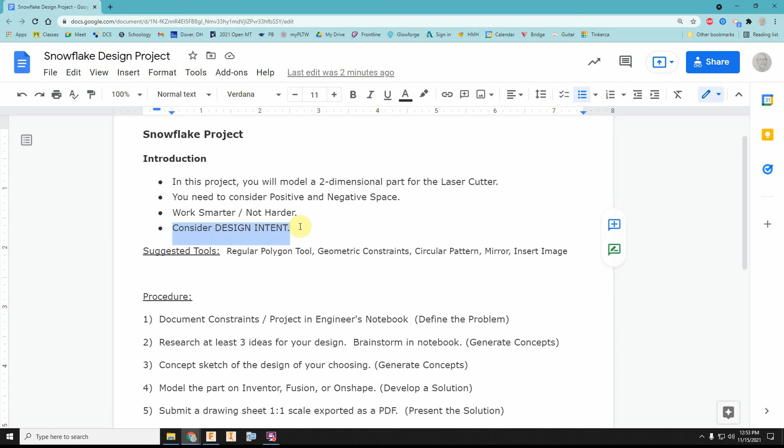In this case, that means we're going to want to make sure the origin is at the center. Makes it the simplest, and you're going to want to think about how you're modeling it with sizes and so on. You probably will want to use the geometric constraints, regular polygon tool if you're doing something geometric, and you can pattern that. If you are going to do a more complicated snowflake, you're going to want to do an insert image, which in Fusion is called a canvas.

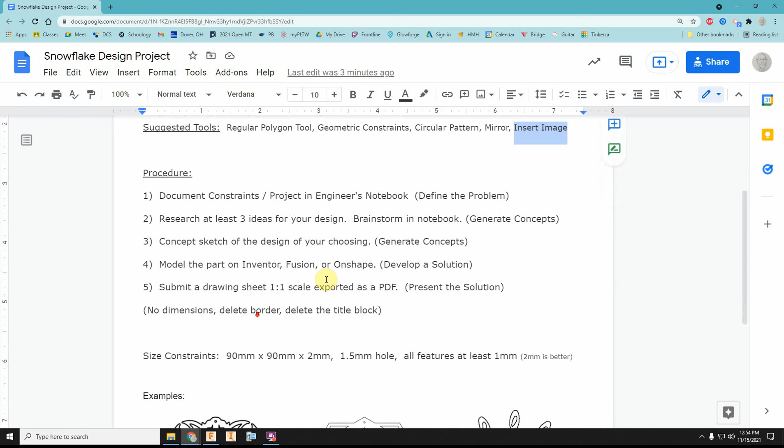For this project, demonstrate the full design process in your engineer's notebook. Document the constraints, research through ideas, brainstorm, make a brief concept sketch. You want to have an idea of what you're going to do before you start sketching on Fusion. Then you'll go ahead and model the part. There'll be another video that explains how you need to submit your drawing sheet for the laser cutter.

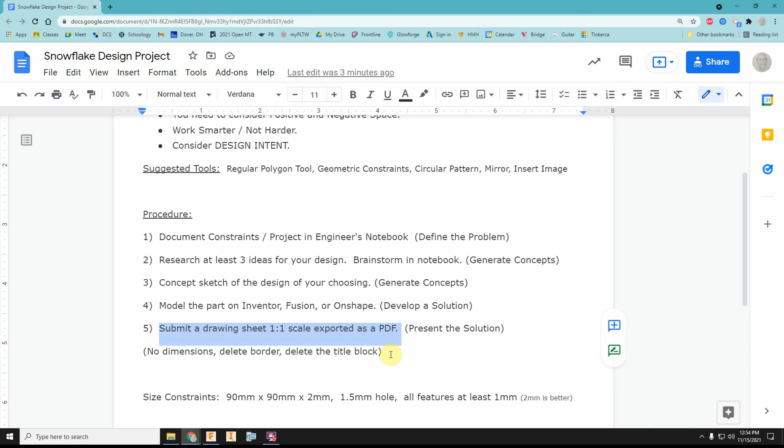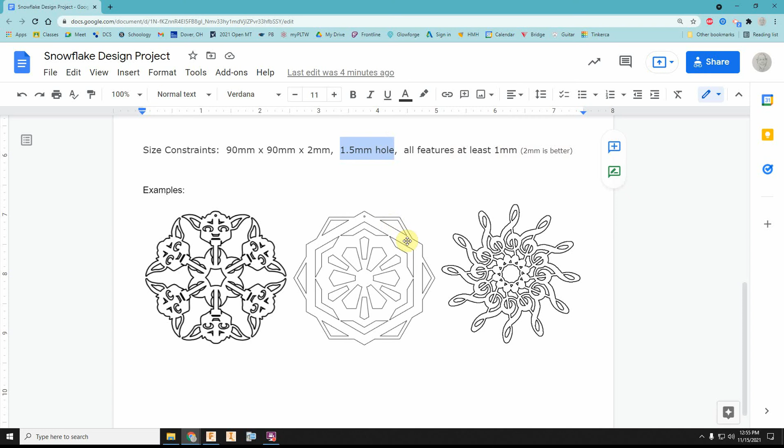The size constraints are 90 millimeters by 90 millimeters by 2 millimeters, and if you need a hole, you can drill a 1.5 millimeter hole. We're cutting these out of acrylic, and all features need to be at least 1 millimeter, though 2 millimeters is probably better. When you cut the plastic acrylic with the laser, it melts, so it makes it quite a bit smaller. So even though we're in metric, make sure you're making things a significant size, or your snowflake is going to fall apart when it gets cut out.

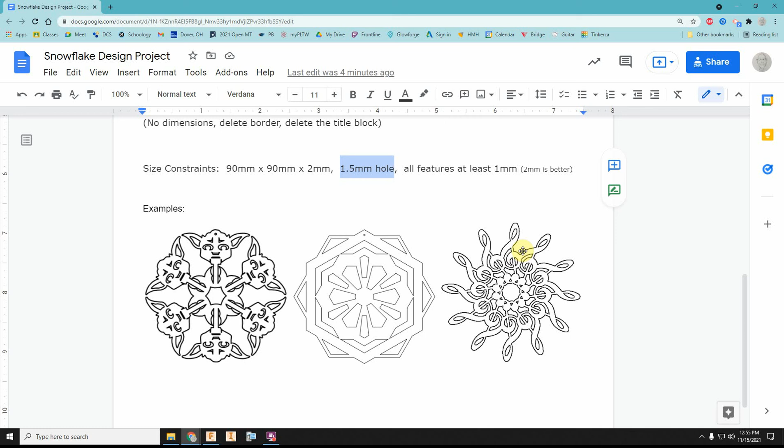Okay, so here we see some examples. We see the Yoda snowflake patterned 6 times, and of course the rebel sign incorporated into his neck. Here's a geometric design, and then there's another geometric design with the G-clef. So you can do something more complicated or something as a geometric design.

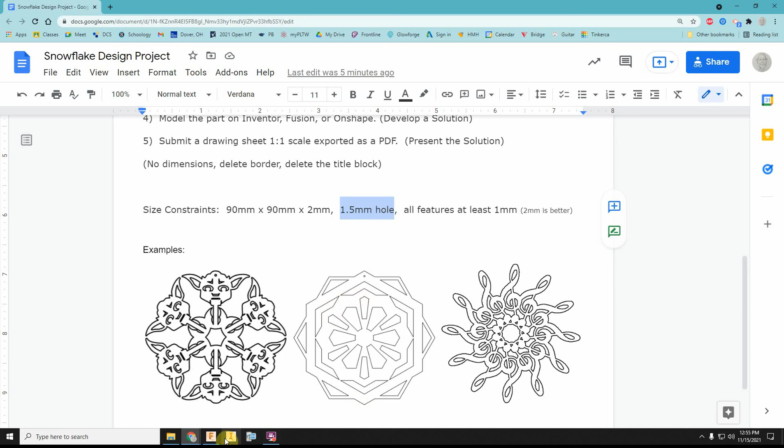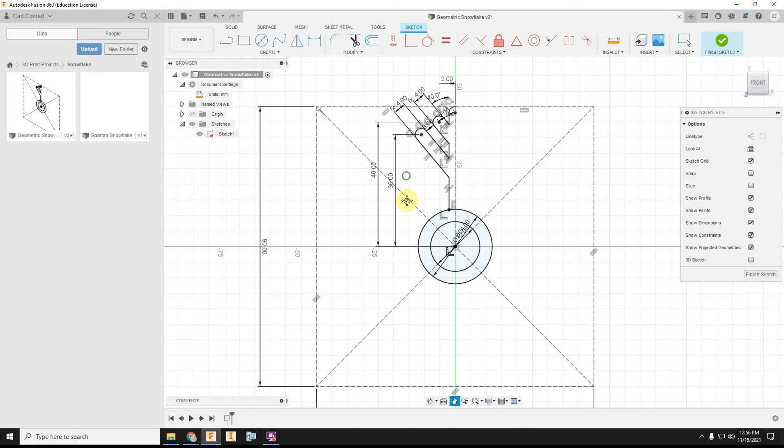Let's look at what a geometric design might look like. I've already got some things sketched out, and I'm going to go in and edit that sketch. One of the things that's really important is I've got construction lines drawn and sketched out so that I know I'm going to fit inside my 90 millimeter size constraint. The dimensions are really important on this, so make sure that we are 90 millimeters in size, or it's going to be too big, and scaling it's not going to work.

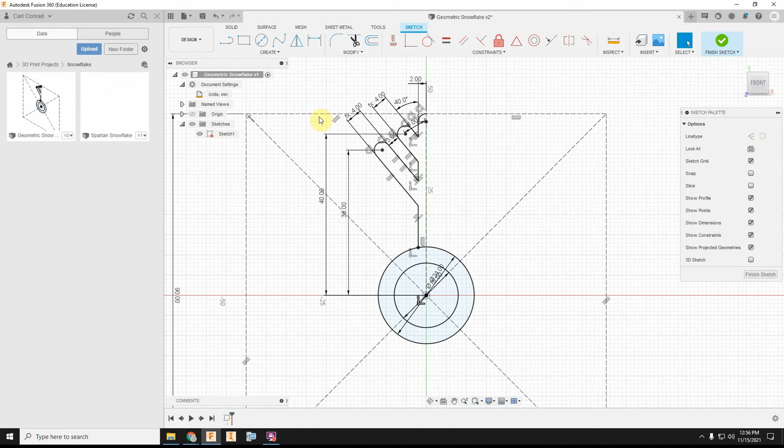I was saying everything should be at least 2 millimeters. 1 millimeter would be the very bare minimum, and I'm going for 2 millimeters, which actually is going to be 4 millimeters of thickness. So what might we want to do with this? I've got a lot drawn out, and the best thing to do is to pattern bodies and combine bodies into a single body. That's going to be the best way to do this with a circular pattern.

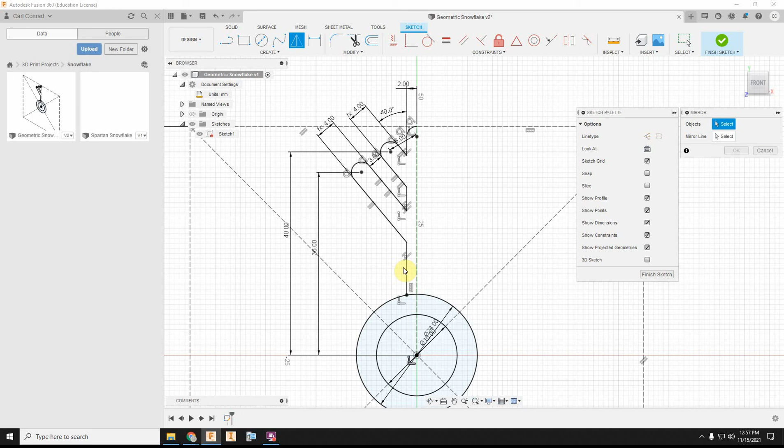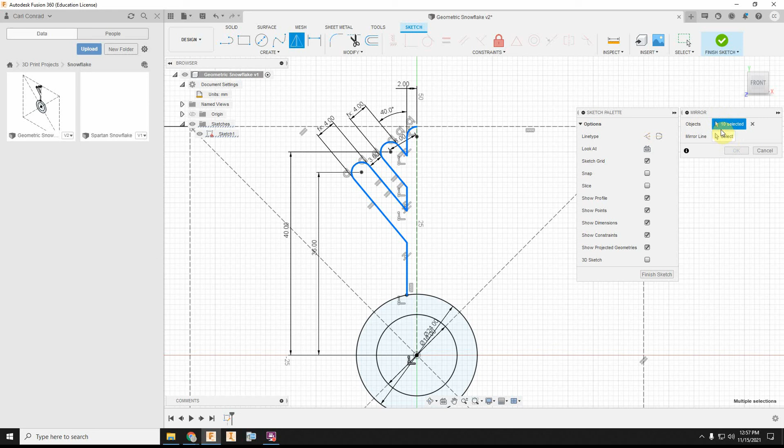So first thing I might do is go ahead and mirror this. You see I have this geometric design here already drawn out. I put in all kinds of geometric constraints to make it look like I wanted, and I put numbers in that I could change if I don't like what it looks like after I pattern it. So there's my mirror. I'm going to pick my mirror line and say OK. I'm going to finish the sketch and go ahead and extrude.

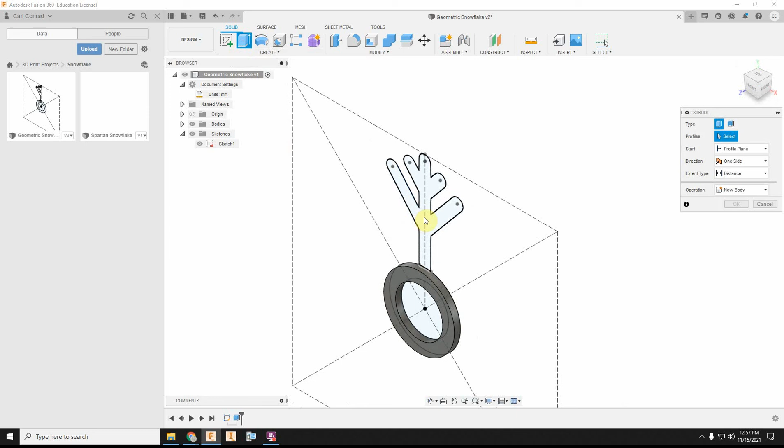When I extrude this, I'm going to select just the circle initially and extrude 2 millimeters. In order to use my same sketch, I'm going to extrude again, making sure I select new body, and also go 2 millimeters. When it wants to join, it's going to say join, but I need to make sure it says new body. The reason for that, if I make my sketch invisible, is I want that body to be separate, and then I want to join them together. It just makes it easier to pattern.

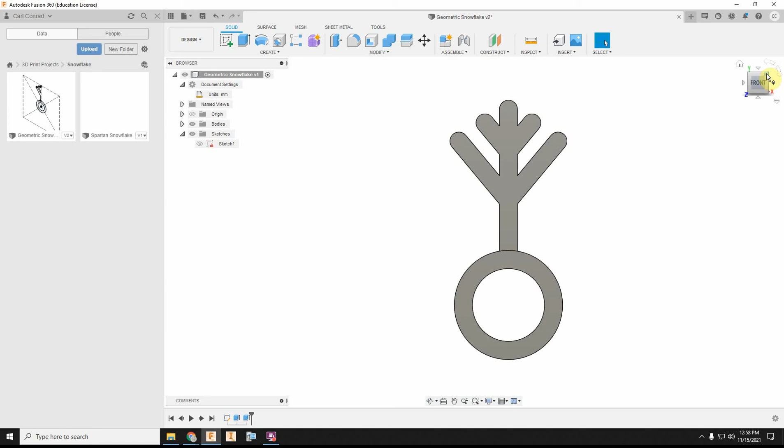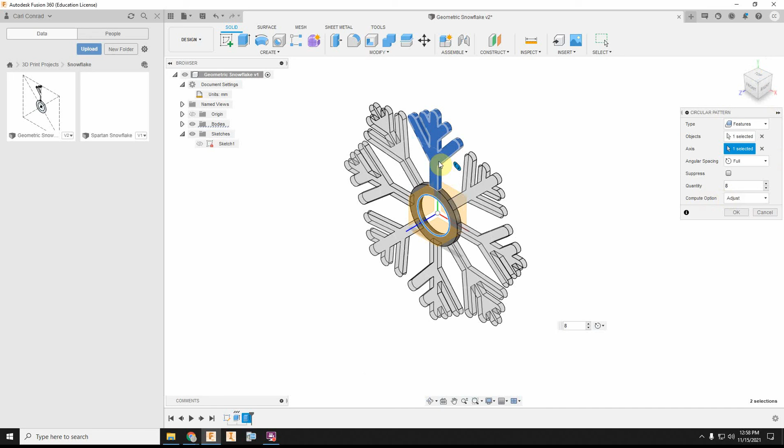So then I'm going to go in and create the pattern with that feature. I can pick the circle or the axis to pattern around, and I could decide what I might want to do with 8 parts or 6 parts. If I go 6 parts, the snowflake looks a little bit sparse, and maybe I would go with something else in between here to make the snowflake a little bit more complete. So I'm just going to go with 8 for now, say OK, and then this would be very important.

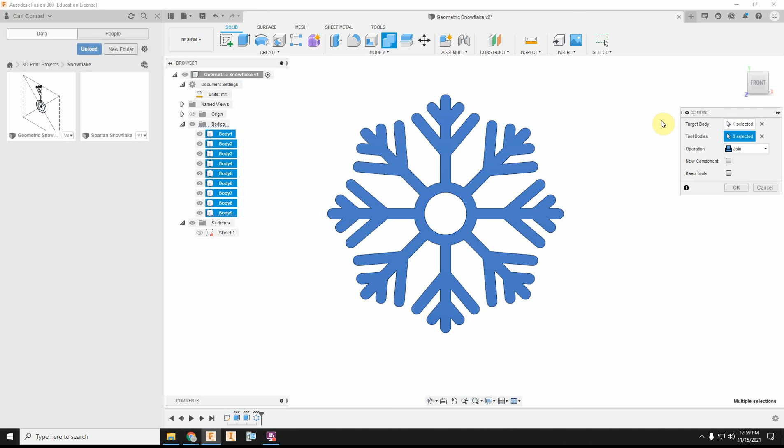Those are separate bodies. I'm going to want to combine all those parts into a single body, so it's just a matter of pointing and clicking. We see I have 9 different bodies there right now, and go ahead and join them together into a single body after you have done your patterning.

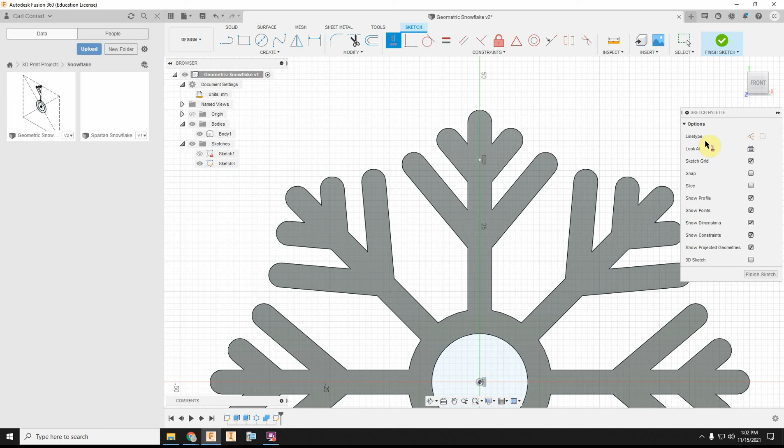Okay, the last thing I probably want to do is drill a hole. I'm just going to eyeball a hole here above the origin. I'll go ahead and make it vertical. Finish my sketch and select my point, and let's drill through all a diameter of 1.5 millimeters. That way I can have a hole to put a piece of fishing line through and hang my snowflake.